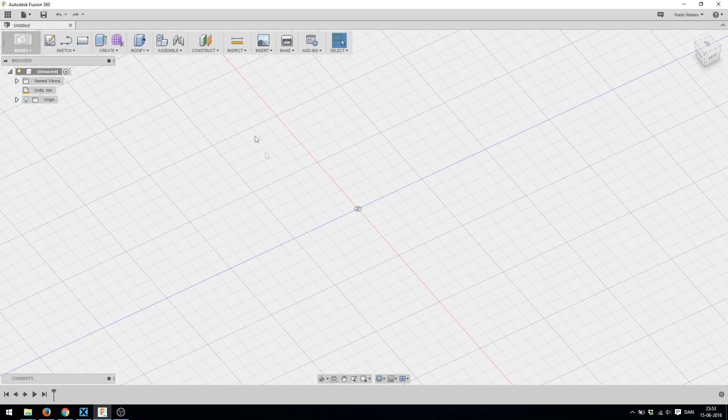So Fusion 360 can work with components, so you can join more objects together and link them and make joints and swing parts back and forth and stuff like that, just like SolidWorks or any other program. So to make a new component, we can right click and press new component on the project here, and we can save the project if we want. That would be a good idea. But basically, when you've made a component, you can just start drawing.

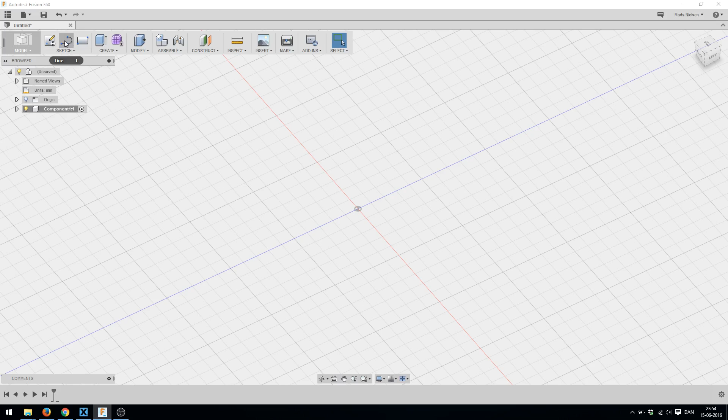So the first thing we'll do is a sketch. Then you select the plane on which you want to create the sketch. You can either press here, or you can rotate the view by clicking this cube. And by the way, the thing we'll be creating is a wheel for my Arduino robot. I've got some geared motors and I want some wheels that can fit them. So I already measured out that the wheel should be 35 millimeters in diameter.

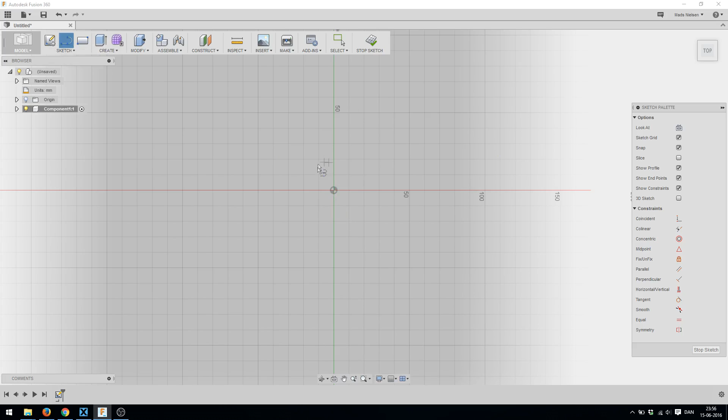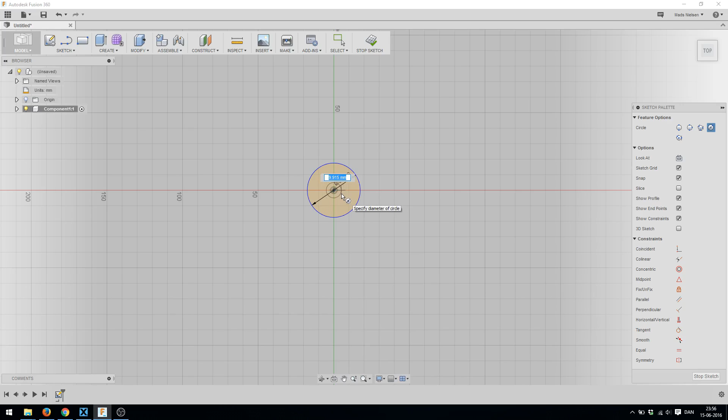So to create the 3D object, we first need a 2D sketch, and we press the sketch button here and selected the plane, as you saw. And now we can create a circle, a center diameter circle, press the origin, and then just type 35 millimeters. We could also just press C on the keyboard to create a circle. And then we want the rim to be, let's say, 4 millimeters, so 8 from 35, that'll be 27.

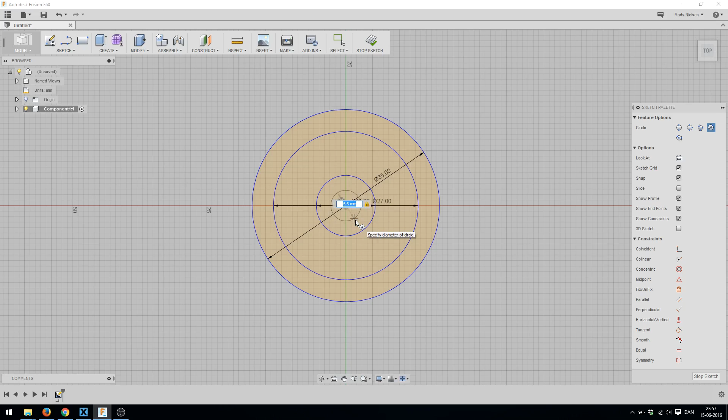Then we'll need the center hub in here. So another circle. Let's make that, let's see, 10 millimeters. 11 maybe. And then the hole for the axle is also a circle, but it has some flats. And the circle is 5.6 millimeters. I measured that on the motor shaft.

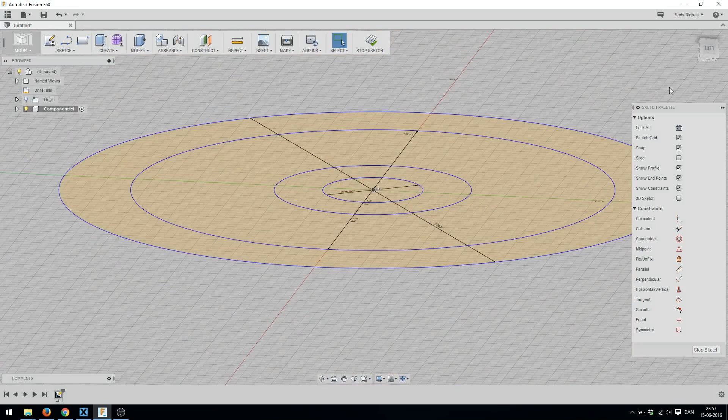And then you can zoom in and out with the mouse wheel. And you can pan around by holding down the mouse wheel. And if you want to rotate the view, you can hold down Shift while you hold down the mouse wheel, and that will allow you to rotate the view. And to create the flats here, we will need a line. And as you can see here, it can snap to other lines or circles or even the grid.

So we click our inner circle, and if you keep it somewhat horizontal, you can see you get a parallel symbol there in the middle. And we can snap it over here, and we can create another one just like that. And then in the center here we can create another line, and we want to use this as a reference, and then by pressing the X button we can make it into a construction line, and this way it's not part of the actual sketch.

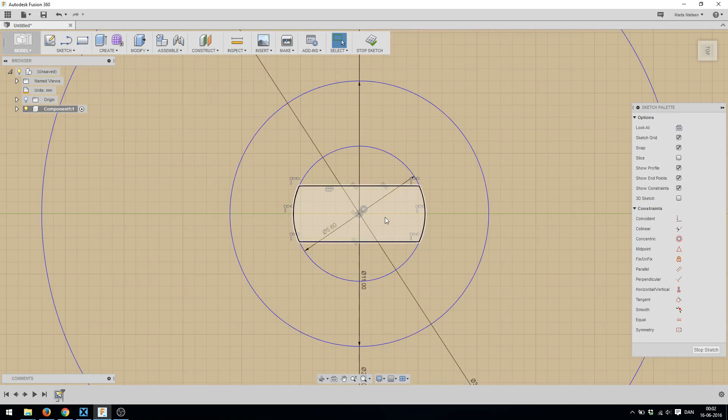So now we can start to put in some dimensions, and you can find that in the sketch menu, sketch dimensions, or just press the D key. And we want to set the dimensions between this line and this line, so we just click those two. And we want that size to be 3.8 divided by 2. So 1.9. And it moved the construction line.

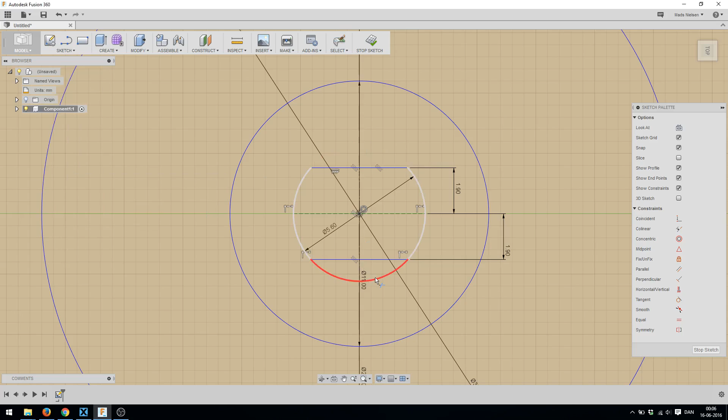So to fix that, we can press the fix/unfix over here and select that line. And now it should work. Yeah. And the same for this one. So now we want to get rid of the excess here, and we can trim that away with the trim tool. It's also the T key. So now we have the shape of our shaft left here.

And so now we'll have to create some spurs to join the center hub with the rim. And there's probably a lot of different ways you could do that, but since I only want 4, I think it'll be just as quick just to use lines. So I'll make a line for every 90 degrees. And then I'll make some lines from the inner part of the rim to the center.

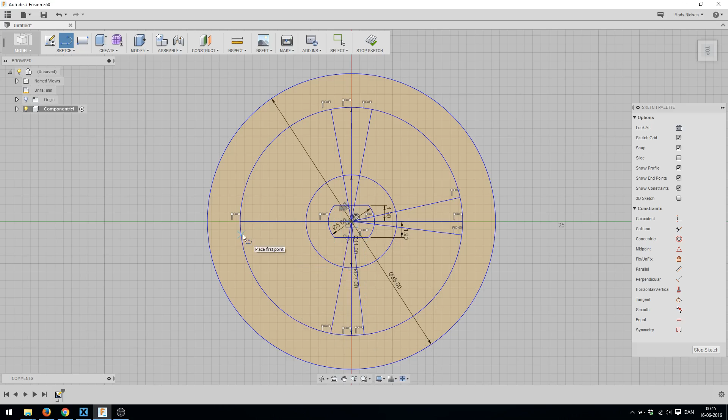And now by pressing D we can place some dimensions. And if you press 2 lines that join in a single point, you'll get the angle between them. So I don't know, this is 10, so 15 degrees. Yeah, that looks fine.

And as you can see, if you keep the mouse inside the angle, you get the small angle, and if you do it outside, you get the larger angle. And you could step and repeat these, so you don't have to do the same thing many times. But since this is just these 4, I think it's almost as quick doing it this way.

And now we can just select these and hit delete. We only needed those to set the angle. And now we need to trim the excess in here. So we press T and just sweep around like that and that.

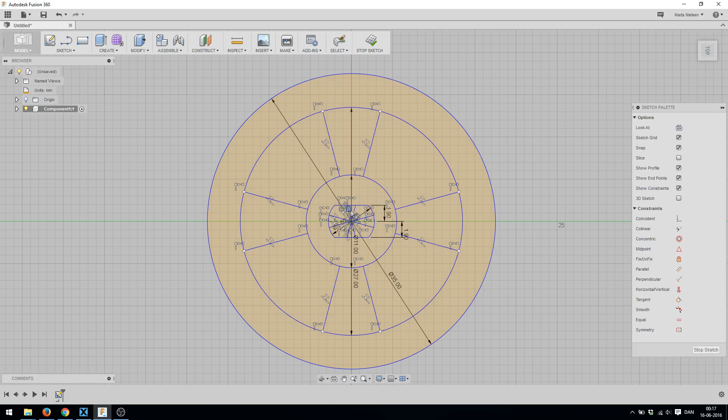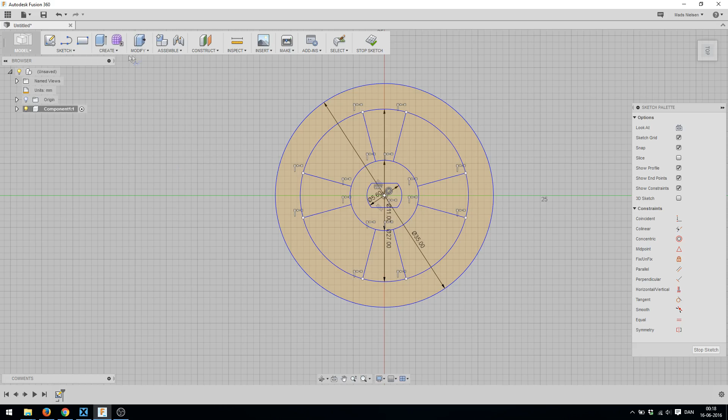Yeah, I like that. So now we can start to make this 2D sketch into 3D, and we'll do that by extruding it. And you'll find that in the modify menu here. It's actually the first icon, press pull, but there's many different things you can do, but we'll be using this one.

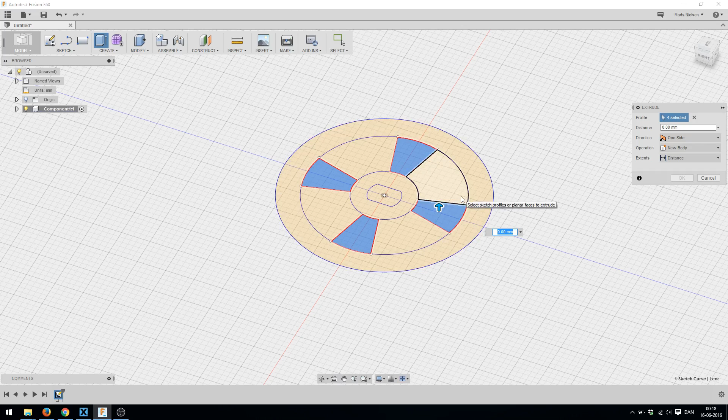So the lowest part is going to be the spurs. So I'll select these. And then we will extrude in the direction of the arrow here. So positive will be this way and negative would be that way. Let's see, I think I want these 4mm. Yeah.

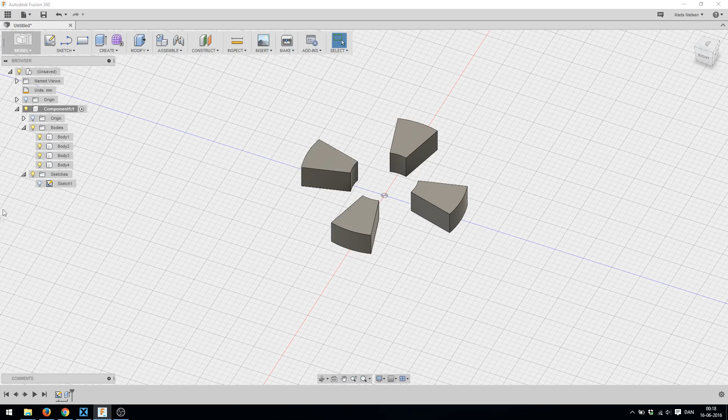And now you can see our sketch disappeared after we did this, but we still want to extrude the other parts. So we go to the component and no, not the bodies. The bodies are the solid pieces and sketches are the 2D sketch that we just made. You can see the light bulb is off, but if we turn it on, we can see it again. And then the rim, I think we want that, let's say 15mm. How does that look? Yeah, that'll do.

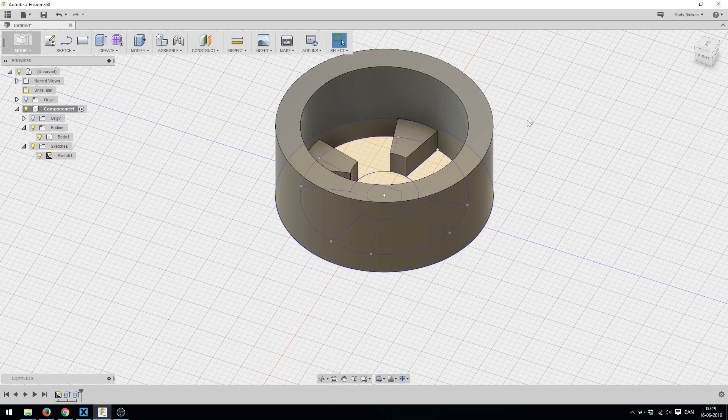And then we want the center hub. And I measured the motor, the shaft is 8mm, so we'll just make it 8. And now we have a basic wheel or a rim, but I don't like these sharp corners here, so we'll add some fillets to make it look a little bit prettier.

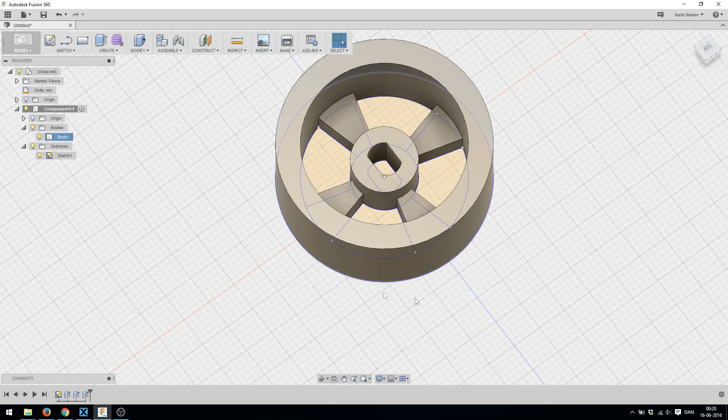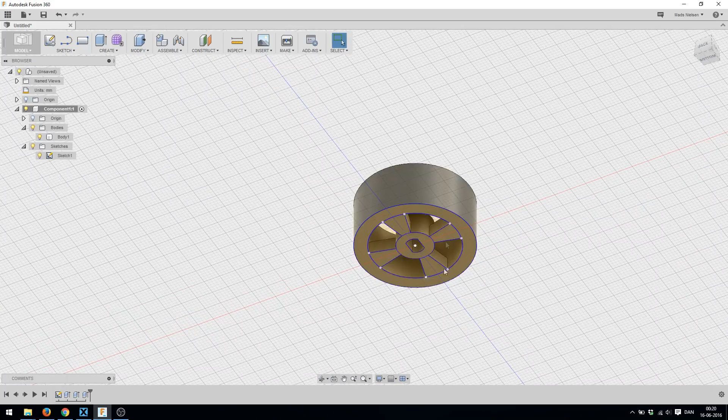I'm actually going to make this wheel kind of reversed, so what you see here is going to be the front. Normally you would have this as the front, but since I'm 3D printing it, I want this side to be flat, so it has good contact with the print bed. And also the motor actually kind of works out better if this is the inside. So we'll just make this side pretty.

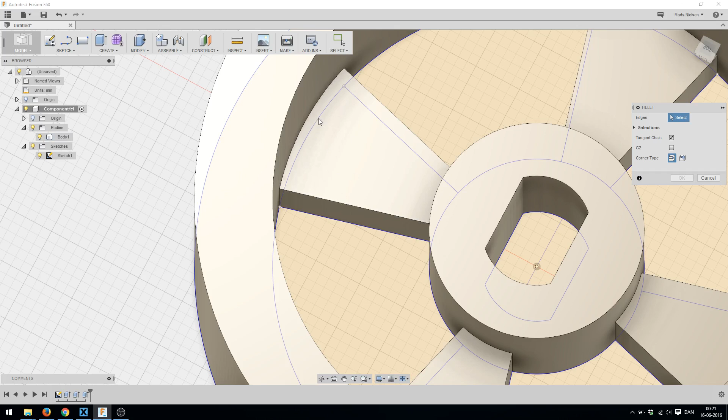And to create the fillet, we can go to modify and fillet. And then we just select the edges that we want to round over. The fillet can both add material or remove material. So if you selected this line, it would remove some material from the corner, and this inside corner, it would add material. But let's just start by selecting these.

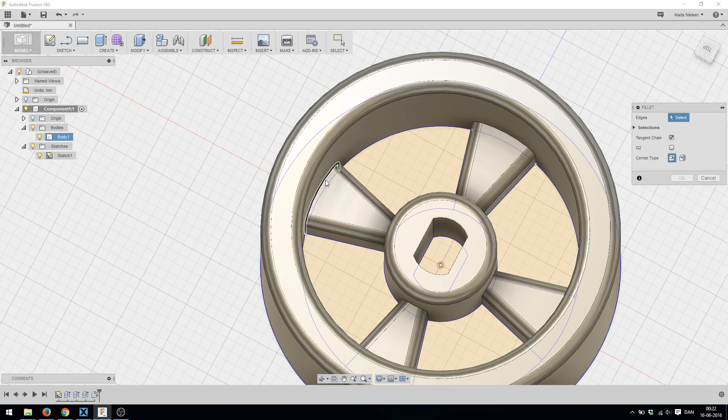And also these should be the same, probably. Then we can specify a radius, 1 millimeter. Yeah, that looks fine. So now we got all those, and by pressing F we can add more fillets. And now you can see, just by selecting this line, it will select all the way around here. We select these and then, how about 1 millimeter? Yeah.

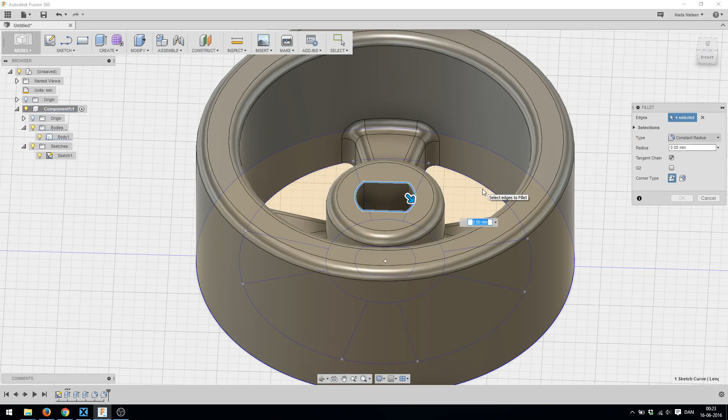And I guess we could do this inside as well. Or maybe I need a screw there. Nah, we'll just do 0.5 millimeter. So now it looks a bit prettier than it did before. But it's slick tires. So if you run these on a wooden floor or tiles or something, it would probably slip if you have a lot of torque.

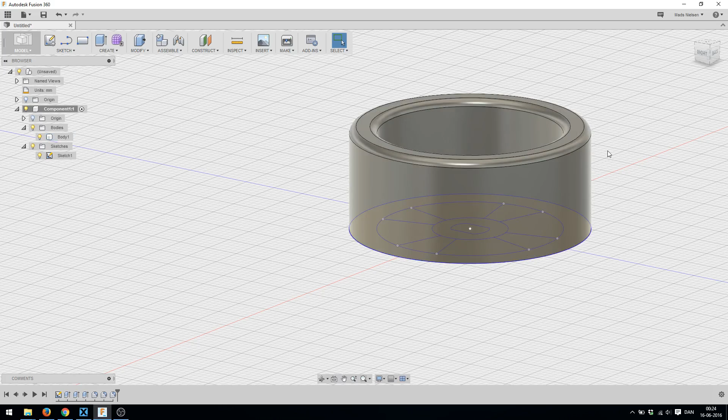So we could do something to this surface to give it a little more grip. Perhaps you wanted to put rubber bands or O-rings or something around the tire. So we would like a channel going all the way around. There's an easy way to do that. If you click one of the side planes up here, say the right plane, and you want to create a sketch, then you can see that the right plane is this one. So if you press that, it allows you to draw on that plane.

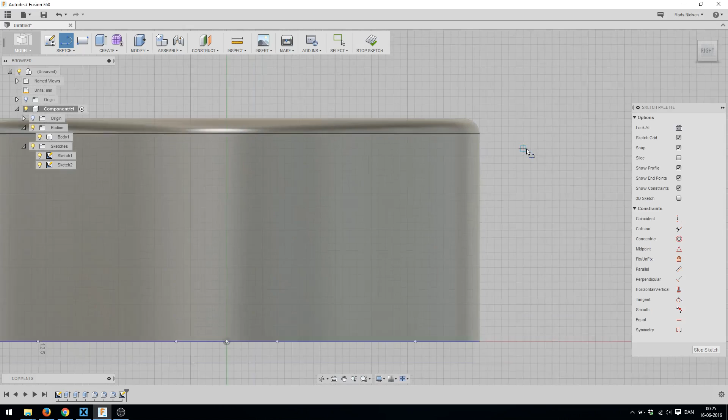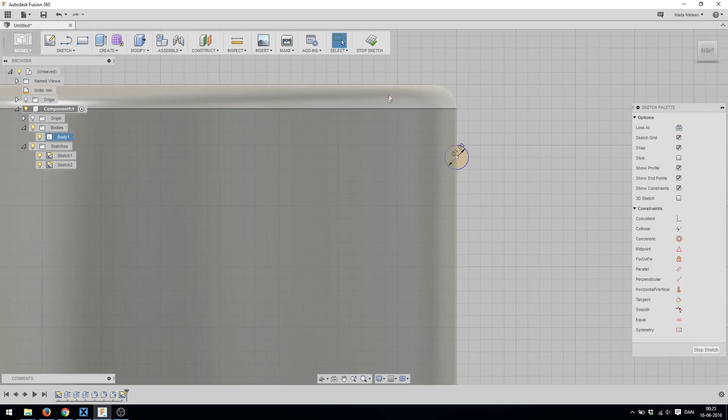So say we wanted 2 O-rings, we can go to sketch, a circle, we just press C. And then if we zoom in, it will snap to the grid here. Let's make it 1 millimeter diameter. Something like that. And then we wanted to have one down here. Oh, I don't bother measuring this. Yeah, it looks okay. At least from the fillet and down, from this side and up.

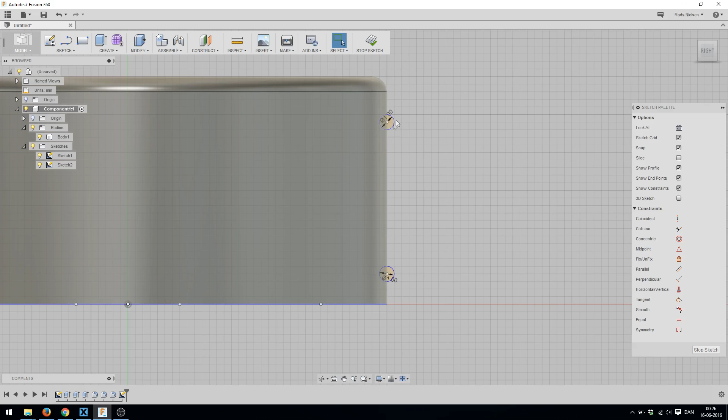So what we want to do now, let's go to create. Oops, I didn't mean to press that one. Create, and then revolve. And then we want to select the profiles, this one and this one. And then we need an axis. I forgot to create that actually.

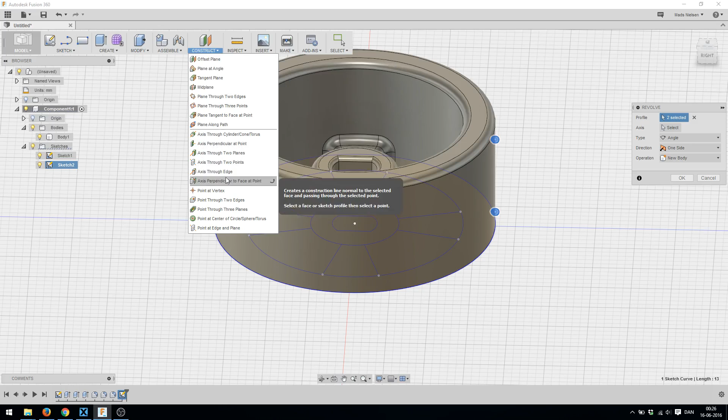You go to construct, and then it's axis through cylinder. It's this one, axis through cylinder, cone, or torus. And then you just select any cylindrical face with the center where you want the axis. So it could be this one or this one. So now we got our axis. We go back to revolve and select these two.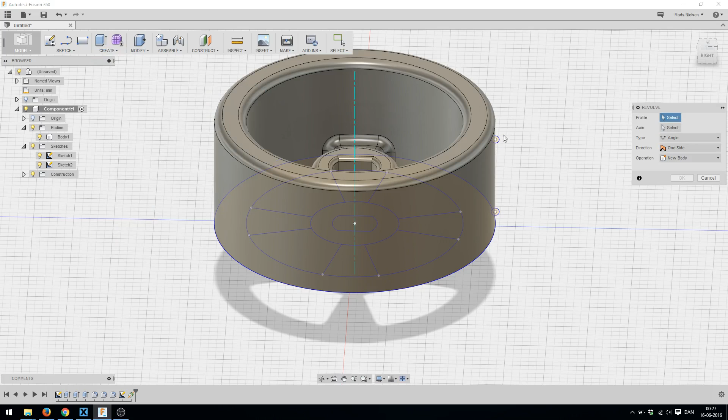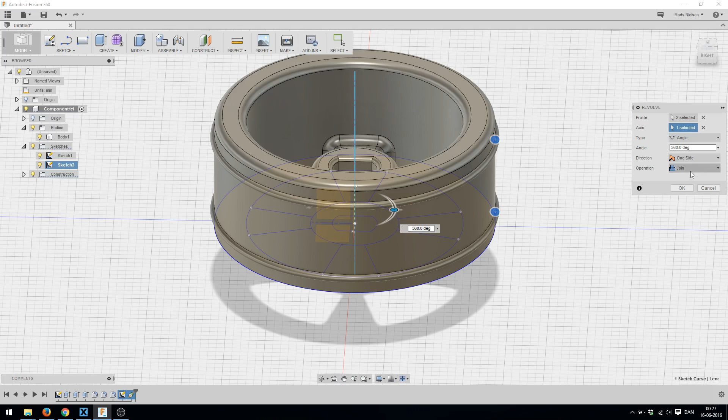And then the axis is this one. And then it wants to do this. You can either cut it or you can join. So it will create some, what are they called? Dimples. But we want to remove, so we will select cut and then press OK. Now you can see we got these channels all the way around.

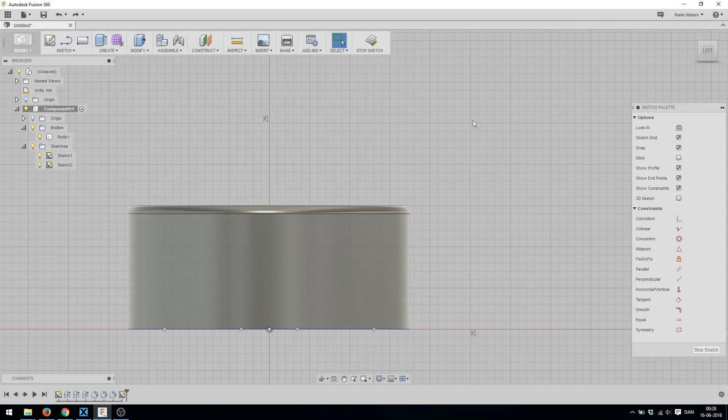But I want to coat this tire with rubber actually, so I don't want to do that. So I'll just press undo. I think I still want something to increase the traction a little bit, but I want them going in the other direction. So I want some dimples or whatever they're called going this direction. So I'm just thinking how I want to do this. I don't think I want them going all the way to the edge.

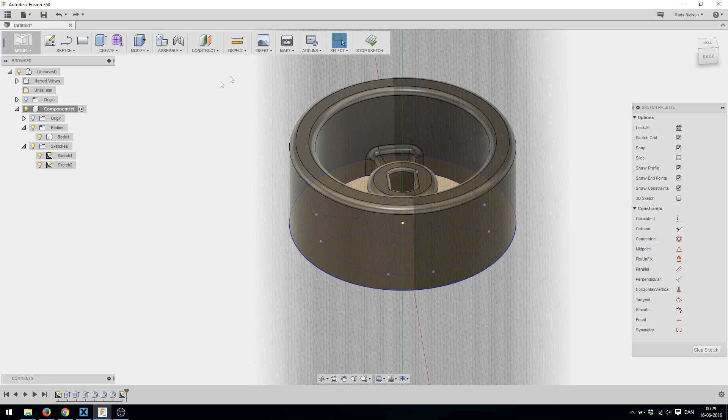We will construct an offset plane, and we'll just select any of these, and then the offset, I think 1 millimeter should be good enough. Yeah. So let's see, we have 1 millimeter there. This is 15, and this was a 1 millimeter radius, so another 1 millimeter from that, 15, that's 12 millimeters. Okay.

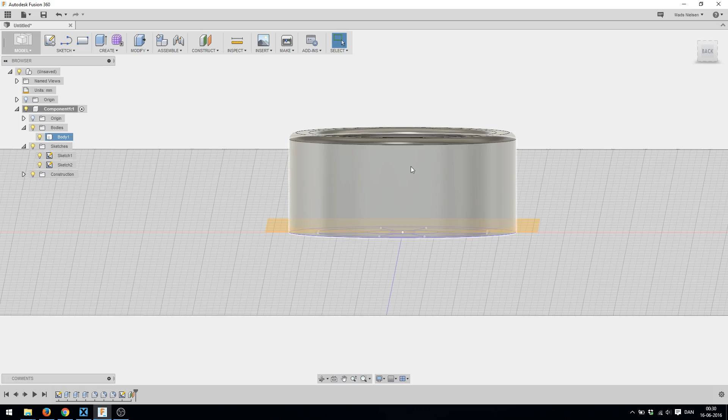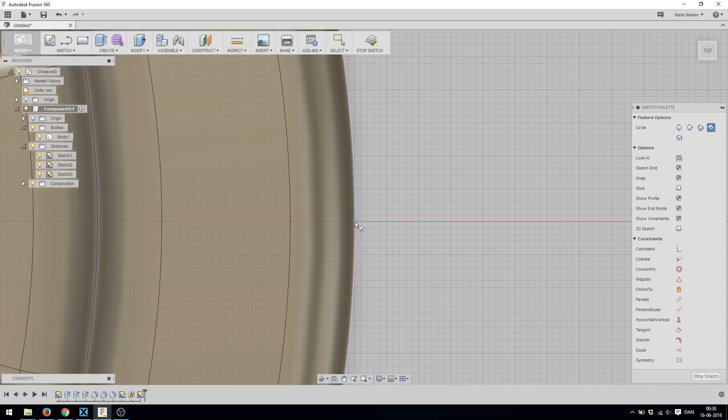But anyway, we want to sketch on this plane that we just made. And then, like we did for the other one, we want to create a circle here. It actually doesn't matter if it snaps to the grid, as long as it just snaps to this circle here. I'll just do it as close to 90 as possible. It doesn't really matter. And then I want them fairly small, let's say 0.5 millimeter.

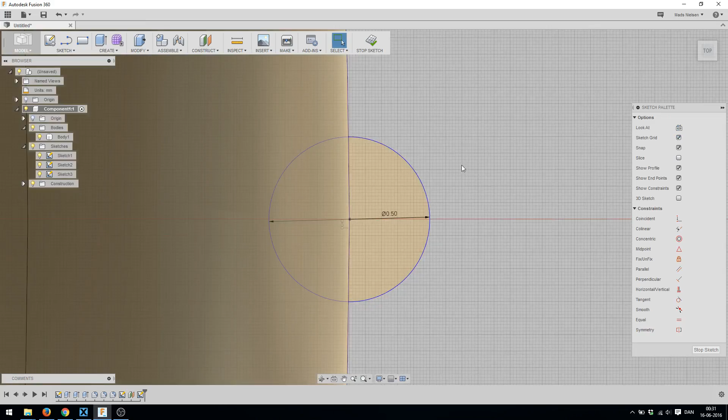Yeah, that'll do. And then we want to extrude it. So Q for press pull, and then 12 millimeters. That looks about right. So I think we should round over these edges also. So we can do that with a fillet by pressing F and selecting this one. So it's a 0.5 millimeter diameter, so 0.25 millimeters should be a full, yeah.

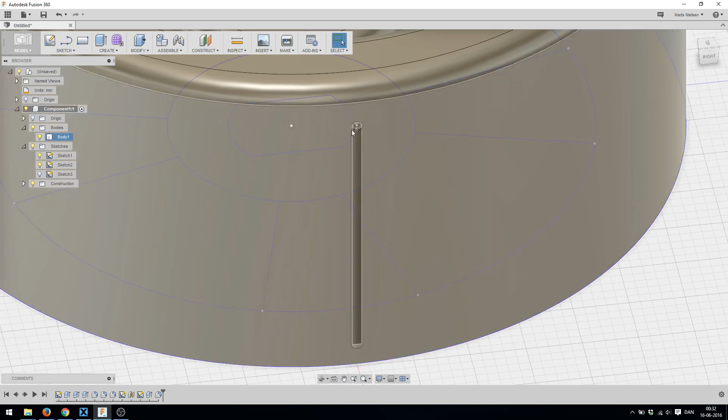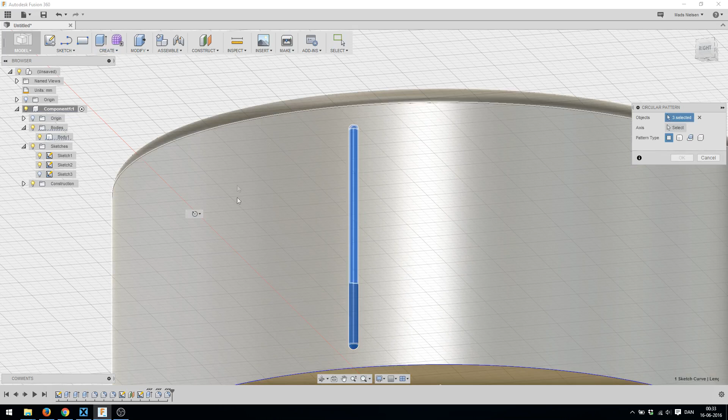And now I want to step and repeat this all the way around the circumference. So we select all these. And then we go to create a pattern and a circular pattern. So the objects, I already selected those, and then the axis. No, I removed it, didn't I? When I undid the other parts. I wonder, can I actually just select that one? Yeah, I could. So you don't actually have to make the axis. It can figure it out just by selecting the cylindrical face.

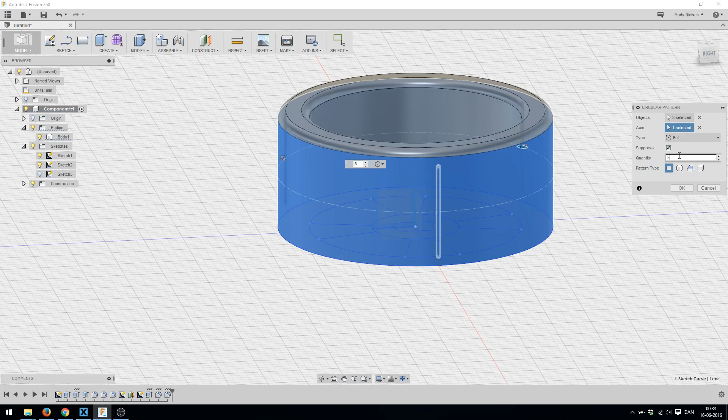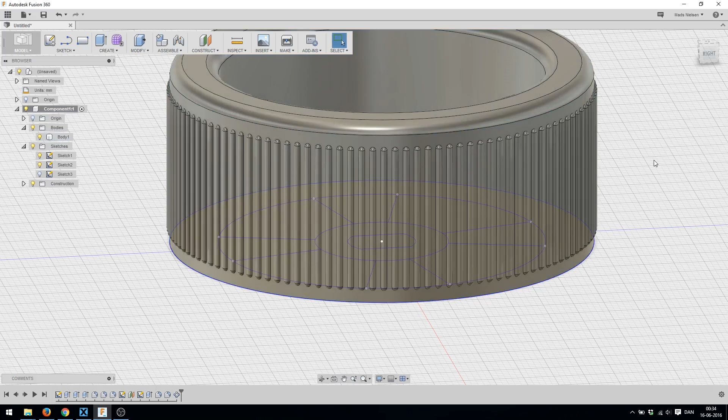Quantity. How about, let's say 90? No. 120. Yeah, that looks more like it. Yeah, I like that. So now we can go and hide this sketch again. So I think we're done, actually.

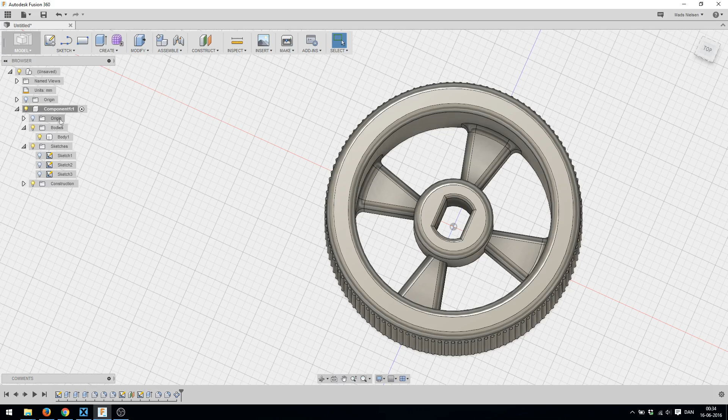Now we can right click any bodies and make an STL file. Or if we had more bodies in here and we wanted to make an STL file of the whole thing, we could right click the component and just save as STL. And the refinement, I set that to high, but I honestly think medium would be okay for 3D printing. The high creates a lot of polygons. We can try to preview it.

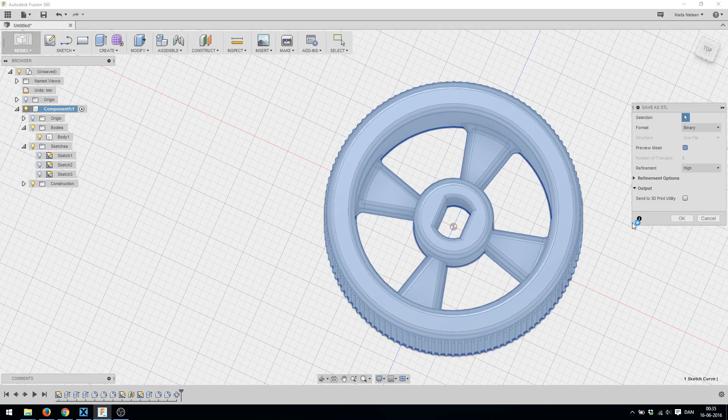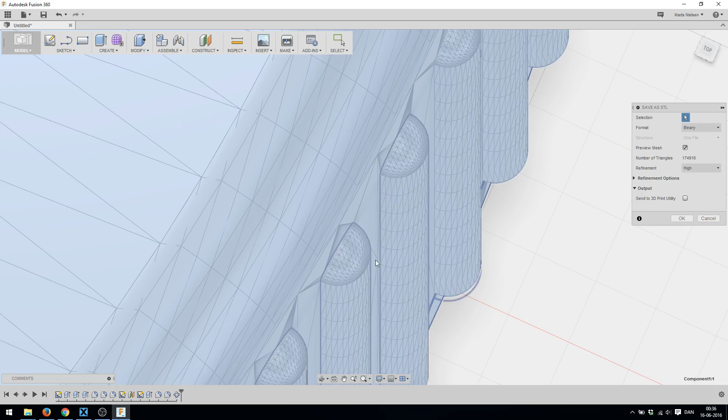And this takes a long time actually. And if we zoom in here, you can see even on these 0.5 millimeter radius cylinders here, we have a lot of polygons. Much finer detail than any 3D printer would be able to make. So I honestly think the medium would be just as good. Then we can press OK and we can save the file. And then you could open it up in MakerWare or Cura or whatever you use for your 3D prints.

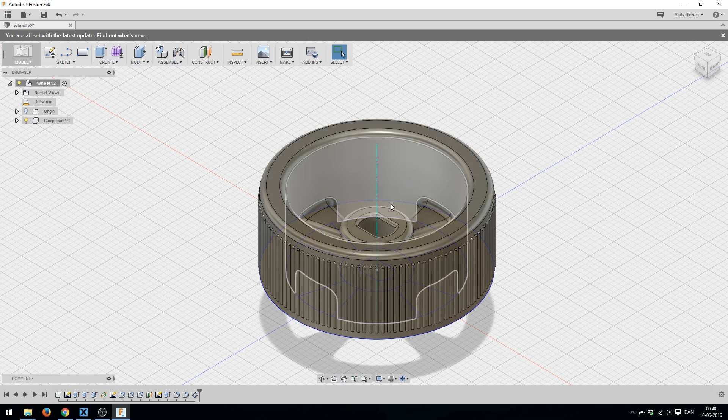But of course you might not want to 3D print this object. You might want to mill it out or turn it or whatever. And for that you would of course need some CAM software to set up the toolpath. And as it so happens, that's built right into Fusion 360. So if you go over here where it says model, you can select the CAM. Now, since I don't have a CNC machine, lathe or mill, I haven't really used this CAM software.

But if you want to see how it works, you can check out NYC CNC. It's a YouTube channel by John Saunders, and he does a lot of tutorials on how to use both the CAD and the CAM part of Fusion 360. And it's worth checking out if you want to learn how to use this program.

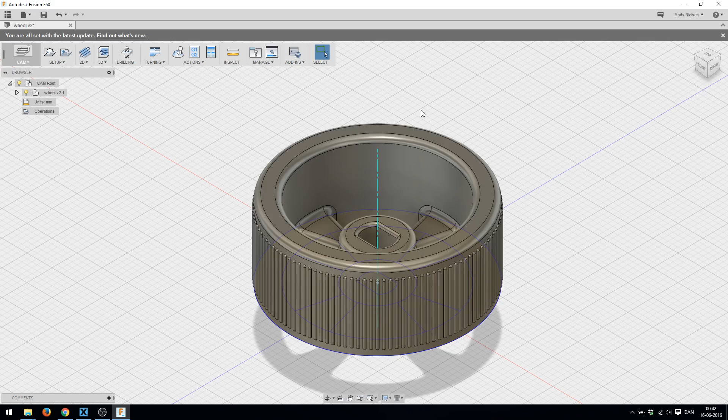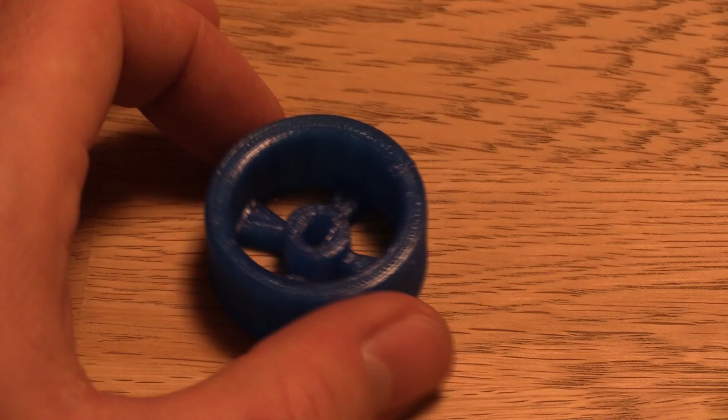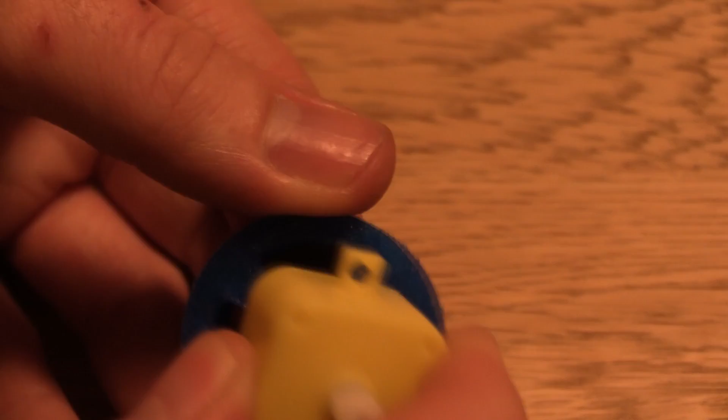Anyway, I think this is it for this video. I just wanted to show you how you can make a simple part like this one and get it printed out. And we can take a look at the printed part once it's done. So here it is. It ended up looking half decent, I think. Of course, this is the back, which would normally be the front. And let's see if it goes on the motor. Yep.

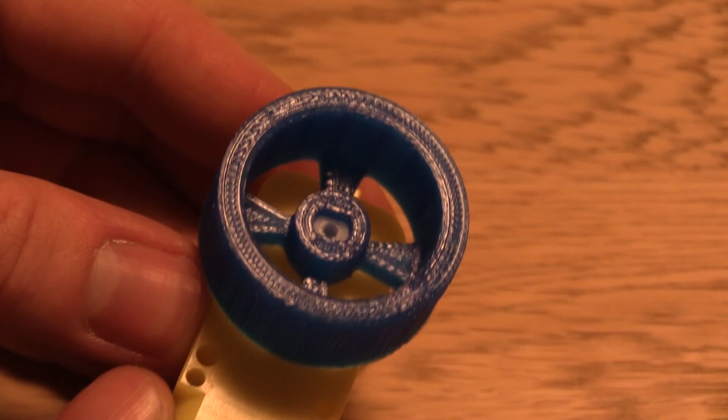Yeah, it doesn't run entirely true, but I guess that could be fixed. Yeah, so that's it. It didn't take very long to make it at all. It took far longer to print it than to actually make the design.